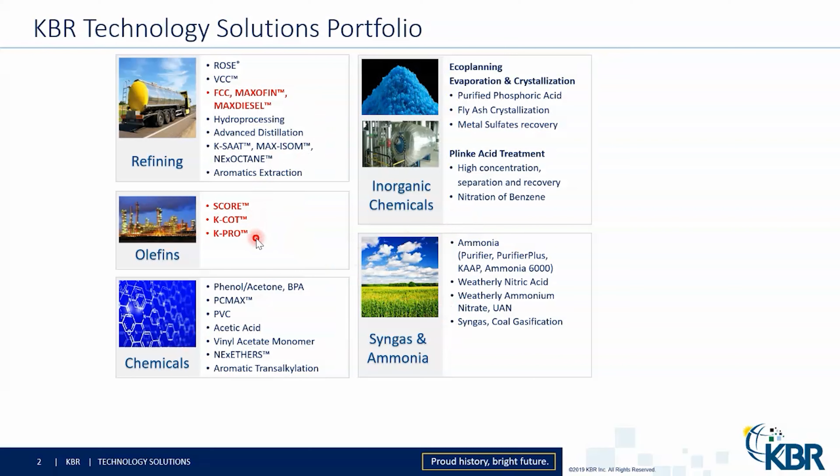Let's talk about some very broad, general, overarching industry trends. In the refining industry, in particular in Europe and North America, the demand for gasoline is decreasing. And this is associated with the growth of electric vehicles. We expect that this trend will also broaden to other areas of the world, including South America.

In the petrochemical industry, we've seen a continued growth, and this also applies to olefins, ethylene, and propylene, which are the largest petrochemicals produced in the world. And we've seen for many decades now that this market increases at a rate larger than the GDP.

So it's therefore no surprise that people are looking at how they can produce more chemicals from the same barrel of crude. And K-COT is one possible scheme. It fits into the overarching demand to produce more chemicals from crude oil.

K-COT is an acronym for KBR Catalytic Olefins Technology. Propylene, ethylene, and aromatics are produced from, in this case, shown pentane and pentene, but it could be other feedstocks also. I'll get to that in follow-up slides. We apply a proprietary catalyst, which is a ZSM-5 catalyst that we specifically developed for this application.

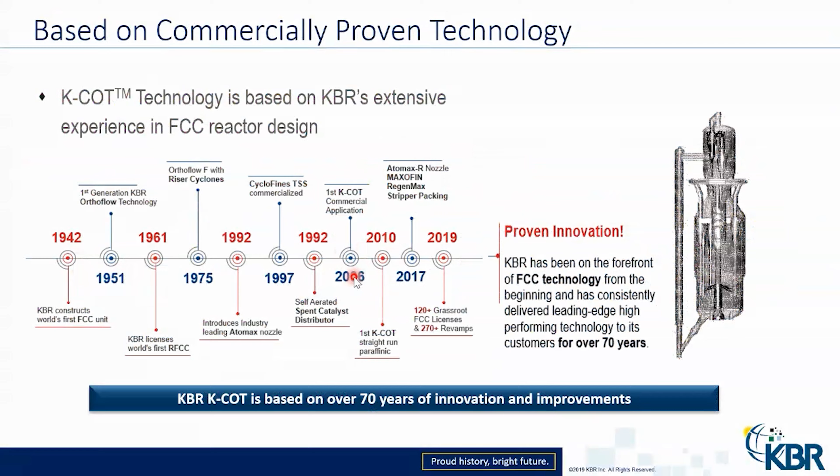K-COT is an extremely flexible technology. It converts low-value hydrocarbon streams directly into high-value petrochemicals, in particular propylene. The technology has the ability to process essentially any C4 through C10 hydrocarbon, be it olefinic, paraffinic, or mixed stream. Let me list a few examples of feedstocks that we have applied in K-COT.

Mixed C4s from refineries and conventional steam crackers. These mixed C4s are usually both paraffinic and olefinic, cannot be fed to a conventional cracker, but are excellent feedstocks for a K-COT unit. Similarly, in the C5s, amylenes, TAME raffinate, and mixed C5s can be fed directly without hydrogenation to a K-COT unit. We've also got cracked naphthas from FCC, steam crackers, cokers, and visbreakers.

Oxygenates also can be fed to a K-COT unit. And there is no need for feed pretreatment. For example, coker naphtha will typically contain some conjugated diolefins, which need to be processed in a refinery scheme, but these diolefins can be taken straight to a K-COT unit without any coking problems.

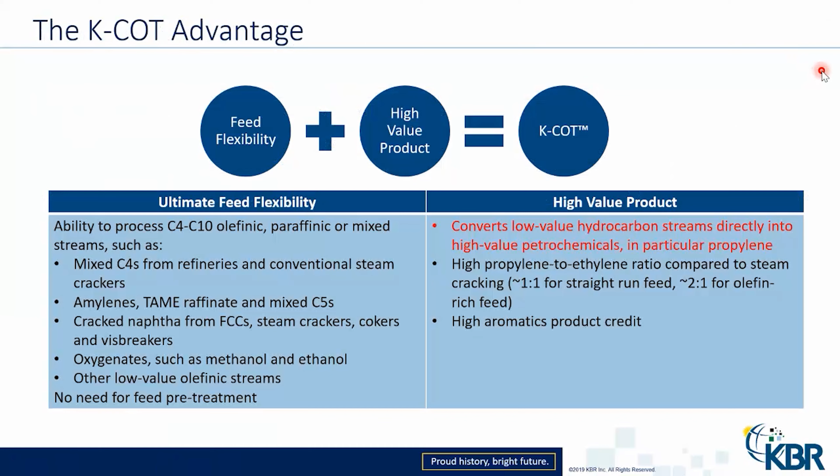So let's recap that feedstock flexibility and compare it to a conventional steam cracking. You'll see that ethane and propane, C2 and C3, cannot be fed to a K-COT. When we do a grassroots K-COT unit and we produce some ethane and propane, which is low value, we typically include a SCORE along with the K-COT unit to handle the small ethane and propane recycle flow.

Butane and straight run naphthas can be fed both to a K-COT unit as well as to conventional crackers. And then there are a slate of feedstocks that can only be fed to a K-COT and would be unsuitable for conventional steam cracking.

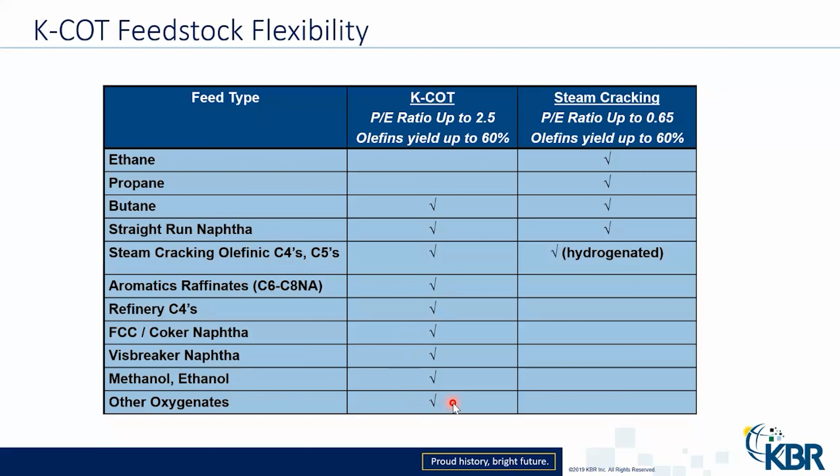And you'll see that in a typical steam cracker, you can run at P to E, propylene to ethylene ratio of approximately 0.5. But in a K-COT on a paraffinic feed, we will reach 1:1 on a propylene to ethylene ratio.

When we look at olefinic feeds, this becomes even more prominent. For example, on a C4 raffinate, you see we produce significantly more propylene than ethylene, and we can reach P/E ratios up to 2. There's no comparison here for olefinic feed between the K-COT and the conventional steam cracker. As I already mentioned, these feeds are very unsuitable for conventional crackers.

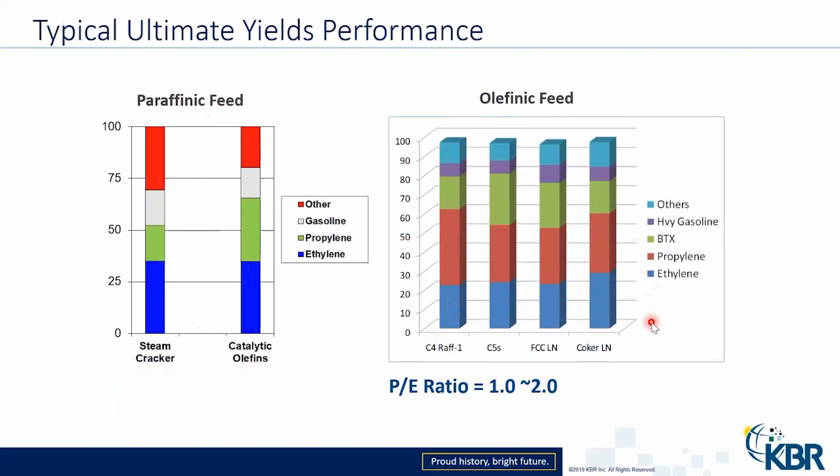Let's look at the flow scheme of a K-COT reactor. You see there are three streams that are fed to the converter: a feed stream, a fuel oil stream, and an air stream. And we'll follow all these through the process. Now let's start with the fresh feed. It is preheated in a feed effluent exchanger and then fed to the bottom of the reactor pipe.

It is here mixed with hot and clean catalyst, travels in a fluidized bed arrangement to the top of the reactor, where it enters the disengager. In the disengager, cracked gas is separated from catalyst. The cracked gas then leaves the disengager from the top, goes to the feed effluent exchanger, and then to an oil wash tower, where fuel oil is mixed with the cracked gas.

This has two purposes. It reduces the temperature of the reactor effluent, it quenches it, but it also washes out catalyst that remained after the cyclone disengager. So it's a secondary separation of catalyst from the cracked gas. Then the cracked gas goes to the reactor effluent recovery unit, which we'll be discussing at the next slide.

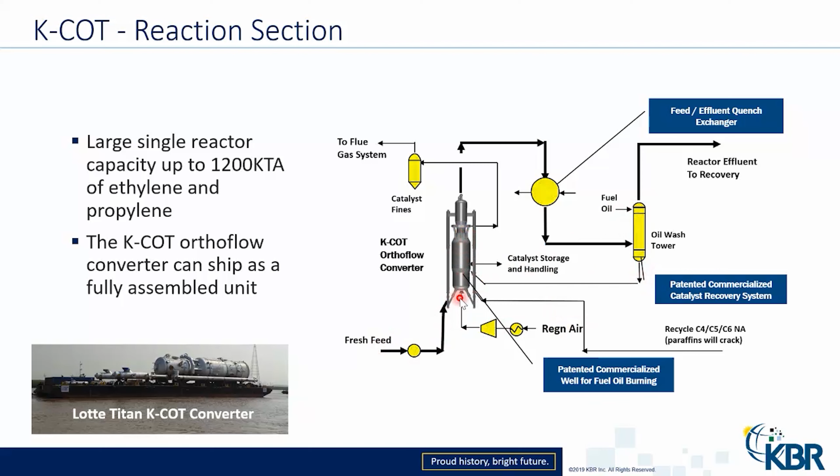Let's talk a little bit about the K-COT recovery section. There's no scheme shown here, and that's for the reason that the recovery sections are always customized. And so they'll heavily depend on the type of feedstock used, but also on which products need to be made and what the specific specifications are of those product streams. So it's similar to a conventional steam cracker, and also there we customize the design.

There's still a few items that are specific to a K-COT recovery section. Some oxygen will travel in the pores of the catalyst and can end up in the cracked gas effluent, and this needs to be removed. So we will have a removal bed for oxygen, which is typically combined with an acetylene converter.

We have the quench oil column design, the quench oil that we showed on the previous slide. That's a special design. And we also have simplified arrangements for C4s, C5s, and C6 non-aromatics that are often recycled in a K-COT unit. Of course, we design recovery sections for energy efficiency and minimizing capex.

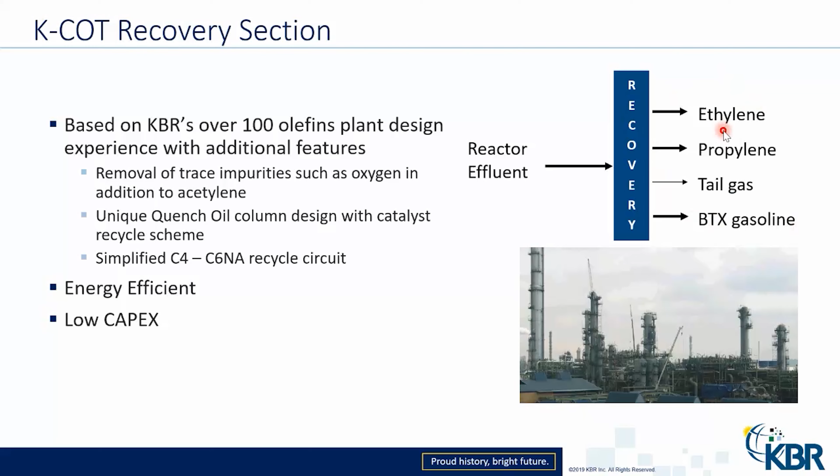Let's talk about the types of industries that are looking for a K-COT. So the first one is liquid crackers. Liquid crackers produce a C4 and a C5 stream and a non-aromatic gasoline, which are in their environment usually very low value. And these can be recycled to a K-COT. So a liquid cracker could consider adding a small K-COT unit to take the C4s and C5s and non-aromatic gasoline and recycle that to a K-COT to produce significantly more propylene.

In integrated refinery petrochemical complexes, there are abilities to add a K-COT and provide a lot of additional flexibility. You can look at upgrading more of your refining as well as petrochemical products with a K-COT unit. Thirdly, and this is something we've been doing recently on a few projects, refiners that are looking for vertical integration. Refiners with an FCC already produce propylene, but a K-COT unit added to their refinery can significantly increase

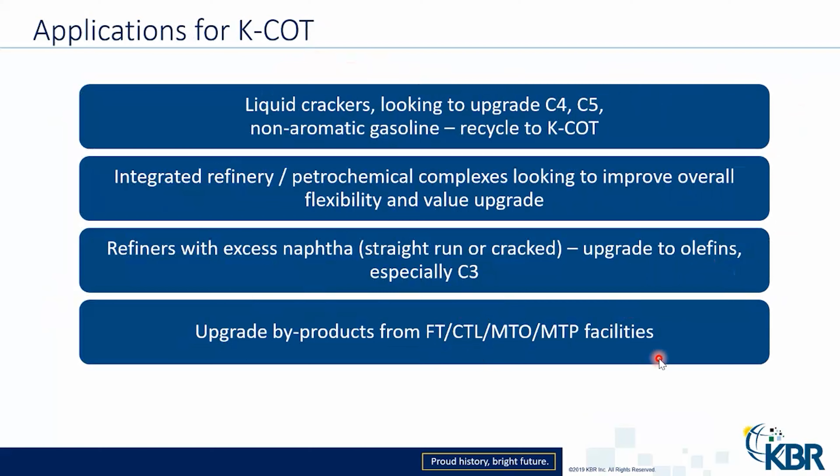their olefins production. And lastly, plants such as Fischer-Tropsch plants, CTL, coal to liquids, and MTO and MTP facilities that can look at converting some of their byproducts into lower olefins.

Okay, this is a very simplified scheme of a refinery with a crude and vacuum distillation unit. In this case, a reformer to produce gasoline and naphtha, a diesel HDS unit to produce a low sulfur diesel, an FCC unit producing propylene, butenes, naphtha, kerosene, and a cycle oil, as well as a fuel oil. And lastly, a delayed coker producing coke and coker light naphtha. This is your refinery configuration.

You're producing several products here that can be upgraded with a K-COT. So a refiner can think of a vertical integration, add a K-COT unit, take some gasoline, mixed butenes, light naphtha from an FCC or a coker light naphtha, and turn those products into high value olefins and high value aromatic gasoline.

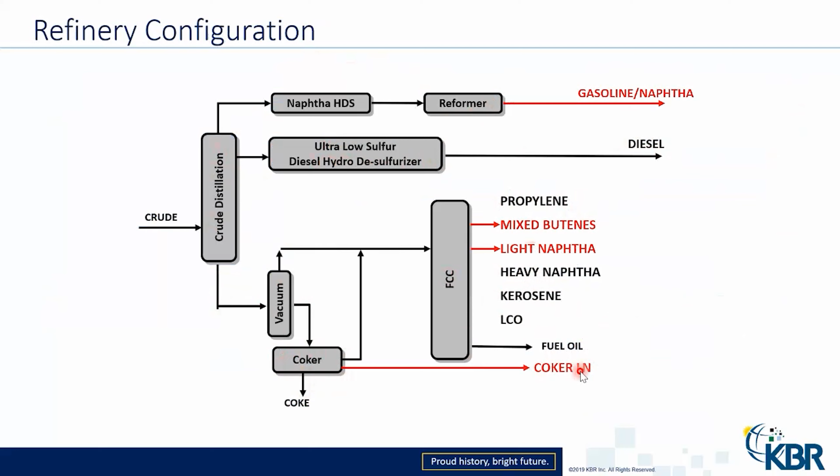We are working on several projects, in particular in China, where we are doing exactly what I described in the previous two slides. And when we do this, we can look at a variety of ways to minimize investments. For example, we can review if it's necessary to debottleneck some units, a gas plant possibly, or BTX extraction unit, or other downstream units, instead of building all these new.

We can look at the optimum product slate. We can limit the number of products, for example, only ethylene, propylene, and a high octane gasoline. Or we can look at other possibilities for product slates and minimize investments. Also, a standalone K-COT can be economic even for small naphtha feed quantities. And as I said, we're working on several of these types of projects in China.

Let me get to the combined olefins process. This is what I refer to in the slide where I said ethane and propane cannot be led to a K-COT unit. So in this particular case, there was an end user, a producer of olefins through a thermal cracking process with a large slate of fresh feeds, which can feed these pyrolysis furnaces and produce a cracked gas that goes to a recovery section.

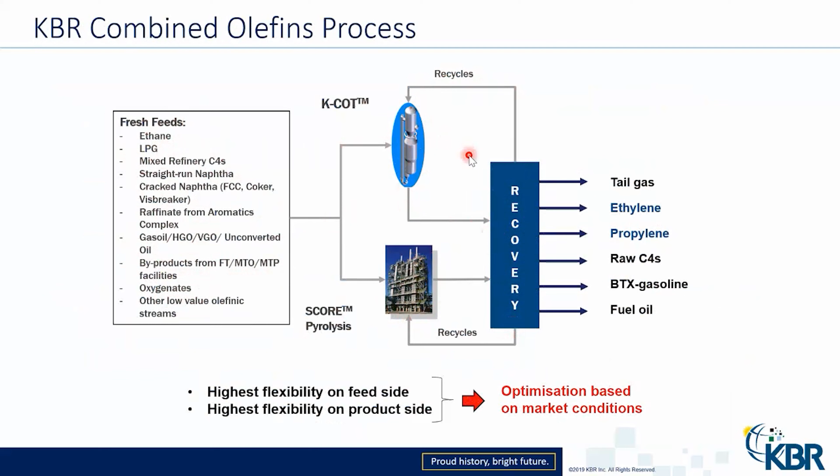We discussed and then implemented an addition of a K-COT unit to take some of these feedstocks, or actually additional feedstocks that the cracker previously did not process, bring it to the K-COT, and the cracked gases from the conventional cracker and the K-COT both are led to a recovery section. Recycles, the ethane and propane in particular, go back to the cracking furnaces, and in particular olefinic streams, C4, C5s, would be recycled to a K-COT unit. And with such a setup, an end user is ultimately very flexible in what they produce and at which time.

So what we did is we looked at that cracker K-COT combination that I showed in the previous slide, and looked at the options that this petrochemical producer has in feeding fresh feed either to the cracker or to the K-COT unit, and recycling C4 plus streams either to the K-COT or to the conventional cracker, knowing that they produce a different yield. And we found that for every month there was a positive gain.

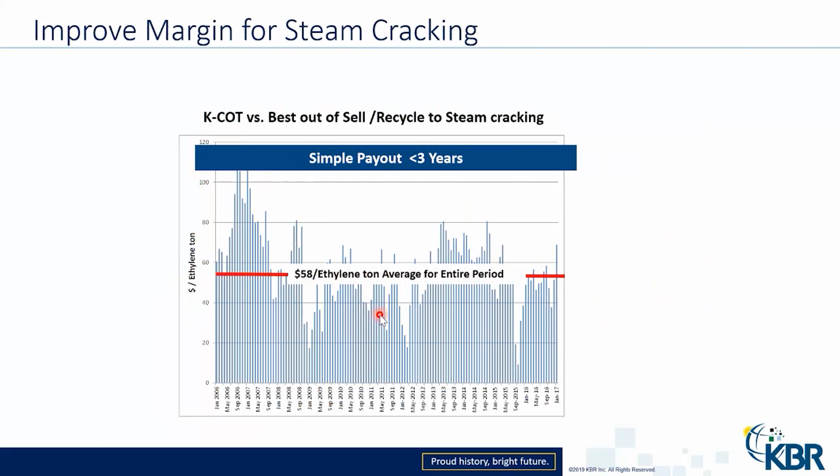So there was a benefit of the flexibility by the addition of the K-COT unit, varying from $10 per ton of ethylene to well over $100 per ton of ethylene. And the average increment was $58 per ton of ethylene produced, which is very significant in this industry, and it had a simple payout in less than 3 years.

Let's talk a little bit about our references and K-COT experiences. We have 3 units in operation. 2 are standalone units with full product recovery, and 1 is integrated with an existing steam cracker. They're all operating well. And we have 3 units in EPC phase, and these are all units where refiners are looking to vertically integrate and produce petrochemicals, 2 of which will produce a dilute ethylene for an EBSM unit. They all produce also a polymer grade propylene.

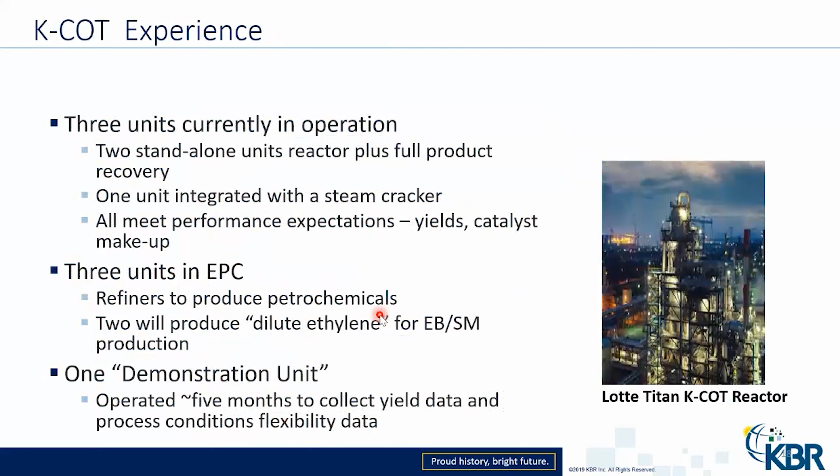And we have a demonstration unit that we used about 10 years ago to collect yield data on a very large variety of feedstocks. I mentioned some of these advantages. I want to just come back to them. So K-COT produces higher propylene yields and also lots of aromatic gasoline. It has a very large flexibility in feedstocks.

We can do very large reactors. So we've done plants up to 1200 kTA of ethylene plus propylene with a single reactor. Feel very comfortable doing that, but it can also be applied in small capacity. And it's all based on well-proven technologies, catalyst performance, orthoflow, which we've used in FCC for so many years, and back-end separation in olefins plants, which we've also been designing since the 1950s.